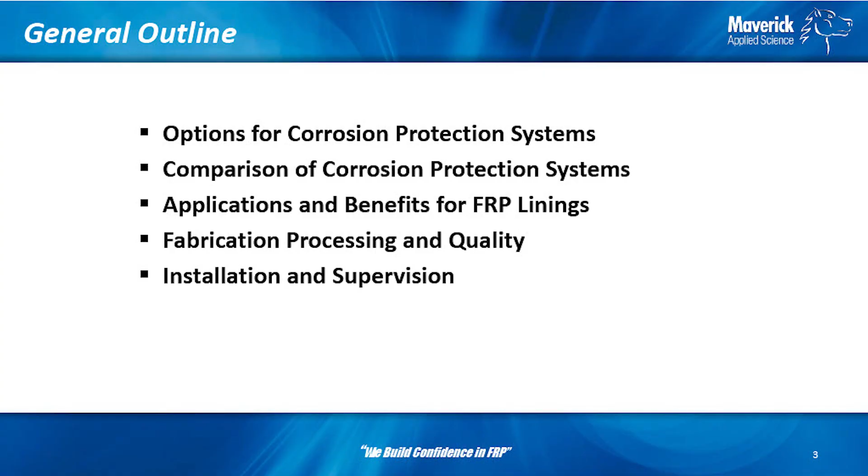As a general outline, we're going to talk about a general view of some of the corrosion protection systems. Then we're going to go in and talk about them and do a comparison, kind of where they fit in the process of selecting corrosion-resistant materials. Then we're going to go into applications for FRP linings, and we'll talk about some of the processing and fabrication as well as installation.

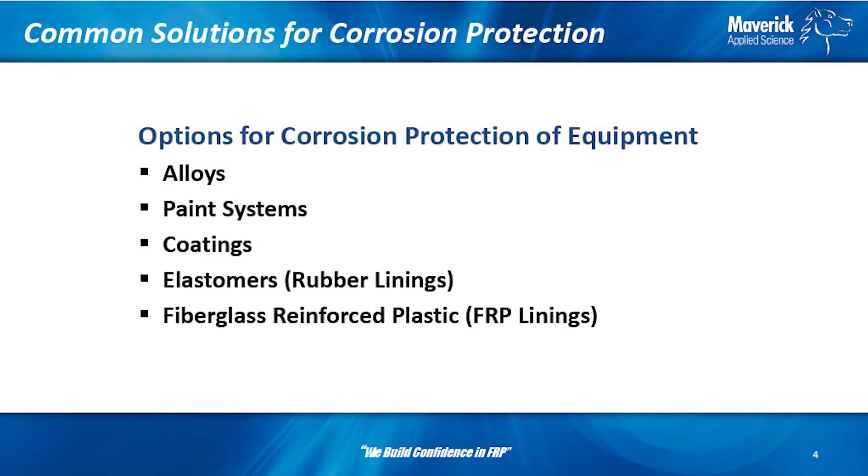When we're talking about corrosion-resistant solutions, this is really your broad group of options. You have alloy materials, you always have paint coatings as an option, and then we get into heavier coatings - more epoxy-based coatings or other trowel-applied coatings. Then elastomers like rubber lining, and also FRP, which can be a lining, or you've seen a lot with FRP complete structures as well. But these are generally your options.

My view of things is that every material has its place and its sweet spot, and there's a range there that they work in. Some of them cross over, but some shouldn't. So what we try to do is find the right material for the right place. And FRP doesn't work for everything, I'll tell you that.

There's some places metals work much better, particularly at higher temperatures. There's times because of concentrations and temperatures, maybe we start to look at dual laminates. Everywhere has an operating range, and what we try to do is find that material that's in the middle of that range, or maybe we want to be at the 75% level of what that material can do.

We don't want to be on the ragged edge of a material selection. If we see a material that's good up to 200 degrees, we don't want to put it in an operation that runs 200 every day and is probably going to fluctuate every now and then and go to 205, 207. We want something that operates at 175 or so - a comfort zone where we know we're going to get good properties and the corrosion resistance is going to be really consistent.

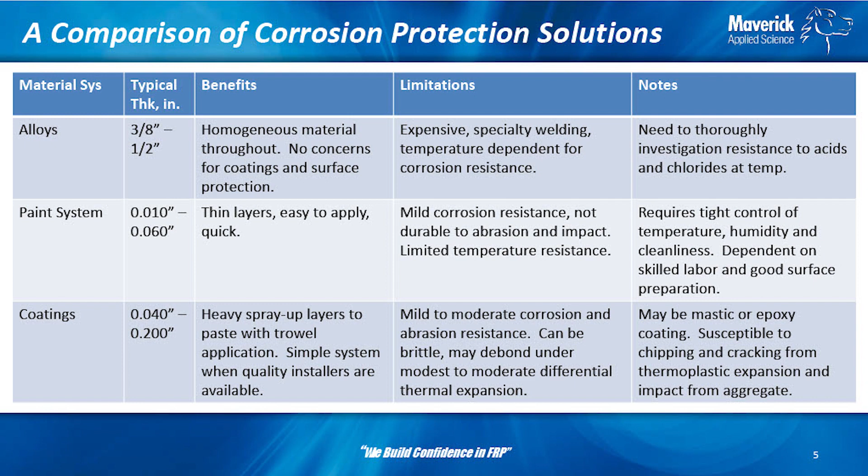So going from there, we're talking about painting. Typically, painting is going to go over carbon steel, which is a fairly inexpensive material, readily available. But painting is not going to work good. We're talking about 2 or 3 coat epoxy systems - those are going to work well when you have modest corrosion-resistant applications, where it's not submerged in a fluid all the time. Maybe it's dealing with leaks, or more outside weathering and that sort of thing. Generally, the thickness is 10 mils to maybe 60 mils thick for a heavy paint coat, so you don't have a lot of material to go through when you're looking at painting.

And then coatings, you're getting into heavier applied epoxies, mastics, things like that. Part of the challenge is that the thicker you get, those materials, because they're basically like a resin material, have no reinforcement to a great extent, or if there is, maybe it's just like pumice or sand. So there's not a lot of durability, they tend to not handle thermal expansion well, and they chip and crack with impacts. So again, they have their place, but you have to weigh these things out on what might work best for you.

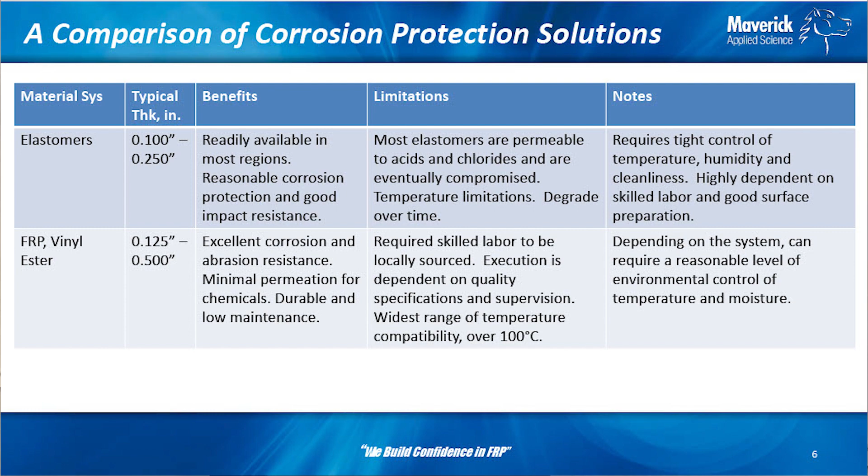So then we get into elastomers - broadly we're talking about rubber linings. Our gasket people probably know the most about those materials. There's multiple rubbers to choose from depending on services and performance requirements. Generally those are 100 mils thick, so 1/8 of an inch to maybe 1/4 inch is pretty common there.

With respect to linings, they are very dependent on surface preparation, and that goes across the board. We talk about white metal finishes, and you have to maintain a quality working environment the whole time. That means it generally needs to be above 50 degrees Fahrenheit and below 100, and it has to stay clean. We want the humidity probably below 75%, between 50 and 75 is really good. If you're in South Louisiana or South Texas in the summertime, that's really hard to do. So if you have those kind of jobs, there needs to be a QC guy in there literally 24/7 measuring humidity and temperature in the work environment.

Because if you come in and, like we've seen places where they just did a 12-hour shift and sent everybody home, you come back the next morning and there's dew collected all over the inside of your tank that was just blasted the day before, and now it has this orange haze everywhere. Well, you can't just go back to work - you need to reblast that thing now because they didn't keep their environmentals up. So for all the coatings, that's always a consideration you need to think about.

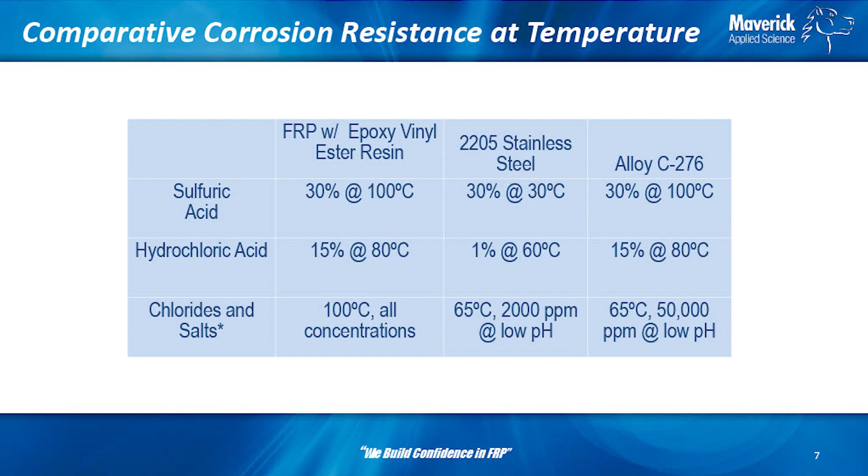Then you go on and look at chlorides and salts - that's a sweet spot for FRP. FRP will handle that almost at every temperature for liquids up to 100 degrees C, we see that. If you look at 2205, it has a sensitivity to chlorides, and it's temperature dependent. So at ambient temperatures, instead of 2,000 ppm, maybe that's 15,000 or something like that. But at process temperatures like what we might see in a chemical plant, a chlor-alkali plant, or an FGD system in a power plant - we've seen where they built and said, well, we want a better material than FRP, so we'll build out 2205. And we've seen through-wall leaks after like 3 years because they weren't aware of the chlorides at the time, because duplex was the big deal. But we've learned a lot since then.

So this is something I put together that's a little different, that I haven't done before. We've talked about these different material systems, and this is based on our experience - what we see based on typical manufacturing practices and typical operation. All those things play a part in service life. Operating conditions here are typically 40 to 80 degrees C, and if temperatures are lower, you extend the life because temperature doesn't play as much a part. Also with abrasion resistance, which I'll touch on from time to time - the type of particle, size of the particle, the shape of the particle, all those things play a part. But just to set some standards, because it is a little subjective.

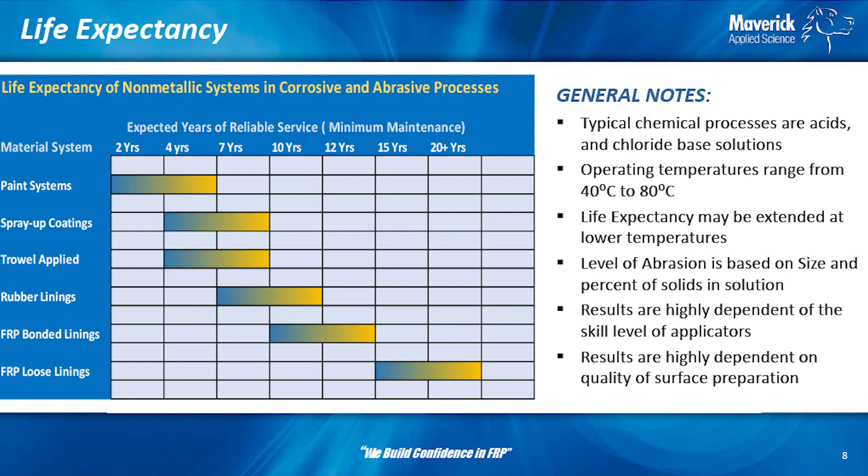And any kind of rework, secondary bonding, that's kind of the issue there. So the rubber lining, 10, 12 years, like I said, we start seeing issues. Something between 5 and 7 is generally where it starts. It's been our experience. I mean, we hear people that say, 'Oh, we've got linings for 20 years or something.' That can happen if it's in a mild service. If you got a great vendor and everything kind of lines up, it can happen.

Dale talked about chlorine headers and 40 years service. We don't see that. So I like to figure out what they're doing, because we would share that. But I mean, it can happen, but there are a lot of factors that have to kind of line up for those things to happen.

So then we go to FRP bonded layers or bonded linings. And so this is basically, like we talked about, we were showing a rubber lining that's peeling off. We've worked with owners where we'll write specs, we'll have a quality guy on site all the time, and they'll blast it out where we're basically doing a test of the surface. So we're actually looking for like a pH value. You want to see that there's no chemistry left in the steel structures. We're checking surface profiles, and then basically we're doing laminate tests to make sure we're doing bond tests and pull tests to make sure we can get a good bond.

And then we're saying, okay, now let's go to work. And they'll do it basically in courses, like from top to bottom or around if it were a really big tank. And it's a lot of monitoring, and generally we can get a pretty good job because there's a lot of attention put to it. And generally that's something 12 to 15 years is what we see on these kind of linings. If it were an FRP tank, we were rebonding it and putting a new lining in an FRP tank, we would see generally the same kind of service life.

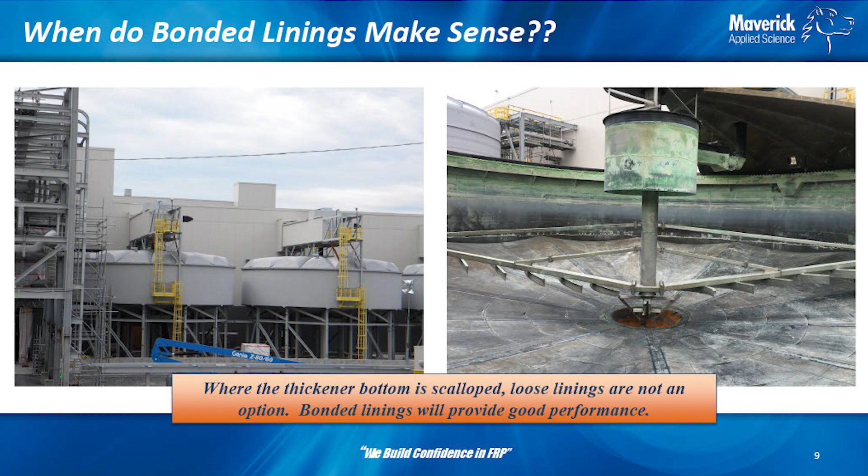So when we talk about bonding, here's a good example. This was rubber lining after around 10 years or so, and they're starting to have some edges peel up. So this is where we would basically blast out the lining, get our surface profile - probably it's going to be covered - and put a primer down so we can get a bond to the surface. We have primers that literally bond to almost anything: concrete, stainless, carbon steel, and they work great as long as we follow the rules.

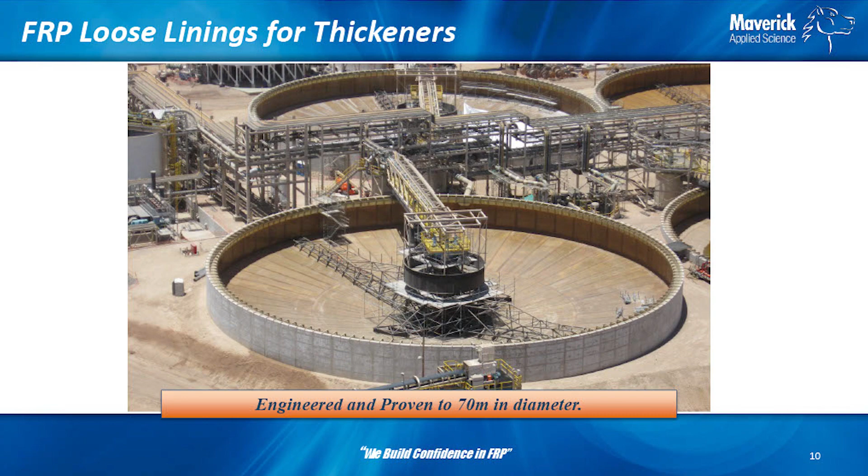And then we're going on with an FRP structural lining after that. So when we talk about loose linings, Kevin showed some photos of this earlier. This is a panel construction, and we've seen these done up to about 70 meters - very large structures, highly engineered. You can see the panels and the amount of weld. If I was doing that all by hand, it would be a patchwork all the way around. We basically eliminated probably 70 to 80% of the handwork that goes into this.

So we're going to drill down on this a little bit more now. As I mentioned, that last one was concrete - I think that was 60 or 68 meters in diameter, so over 200 feet in diameter. We can do it in steel as well; those tend to be more like 30 to 50 meters probably - that tends to be more typical.

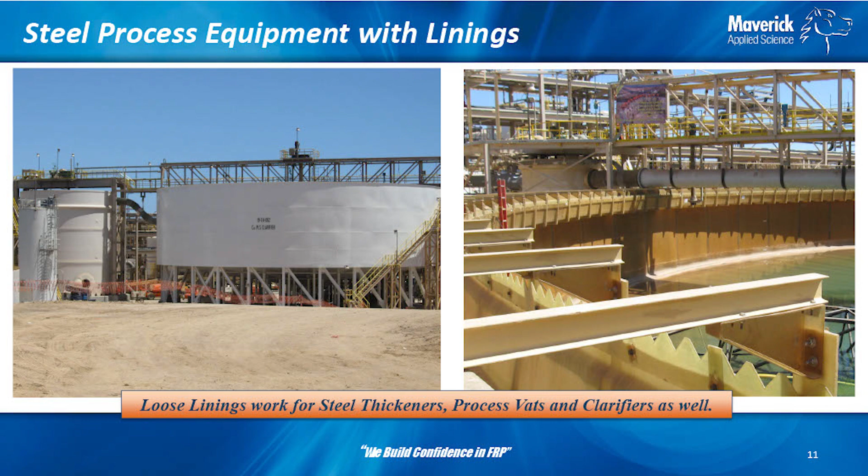With those, basically they're putting some sort of waste material in. It can be something coming to the clarifier from their waste ponds or something like that, where it's got solids in it. In mineral processing, it's going to be a raw, concentrated aggregate with rocks and sand mixed with, say, copper sulfate in a copper process. They're letting the solids settle down to the bottom, and that's what that sweeping rake does. Then the pure clear material comes over the top. We have these weir plates where it trickles into the trough, and they cut off the sweet material - should be cleaner, and then it's further refined after that, just to give you a little insight.

So what makes them work? You've already talked about some aspects of non-metallics - thermoplastic, thermosets like FRP - and thermal expansion always comes up in the discussion pretty quickly. So to give you an idea, we were looking at the coefficient of thermal expansion.

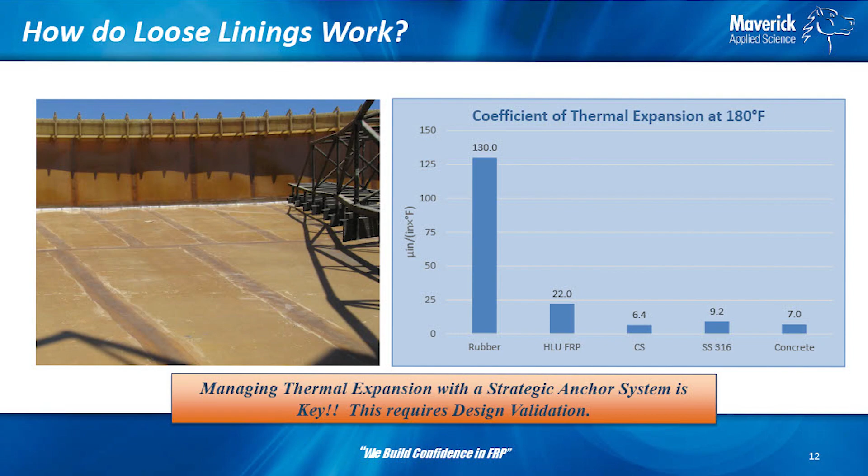So you have rubber here, this is basically micro-inch per inch per degree Fahrenheit. Not surprised that's going to expand and contract quite a bit - you got 130. Here's hand layup FRP, again at process material - this tends to be very resin rich, about 60% resin to 40% glass. That resin is what drives thermal expansion. The more glass we have in it, we start to see that coefficient come back. When we get to filament winding, we're like 60% glass to resin, and that number will go down to 15, 16, something like that.

But when we compare that to carbon steel, FRP is like 3 times as much at that temperature, and you can see where concrete and stainless are as well. So just for that reason, you can see why FRP needs a little bit more attention than what you might expect from a lot of processed materials.

So here's a closer look at this lining. These were the same linings that Kevin showed earlier - this was in Baja, California, very south, very tropic. Our inspector was here for about 3 years looking over these projects, so a really good inspector - he definitely liked this climate. But he would take temperatures at midday, and he would see 140, 150, and all of a sudden, with no pressure, these were expanding such that they were buckling and moving.

So this is part of the design process: you have to look at that full-empty scenario, because others hadn't, and we actually saw panels cracking at the joints. So it's not like you can just buy a bunch of panels, throw them in there, weld them up, and expect everything to work out.

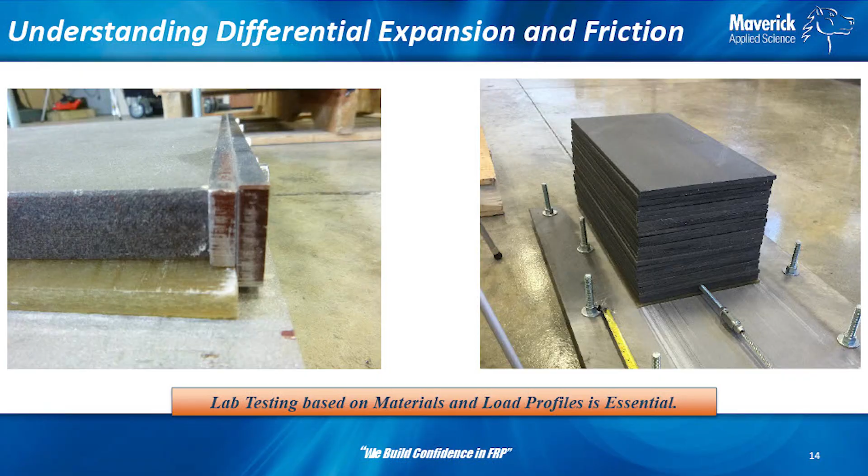So we actually made a sled with an FRP panel on the bottom, made to a certain roughness on one side, and did friction testing. We pulled it across a defined steel plate, basically like what we'd see in the process. We looked at what the friction was, and each of these plates represents about a foot of liquid, so we looked at it at different liquid levels to understand all the aspects of what was going on.

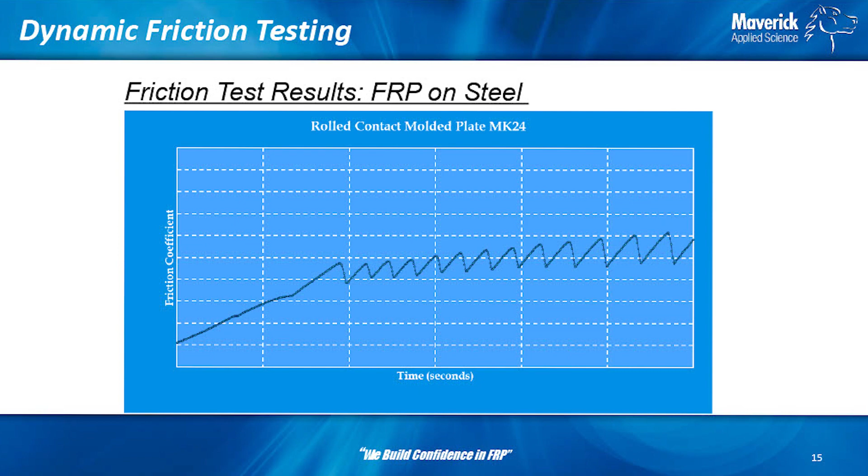This is what a dynamic friction test looks like. You go from static, and you're pulling where it resists, and then you hit a point, and all of a sudden it gives, and you see this kind of effect after that. So this is what a result might look like, to give you an idea.

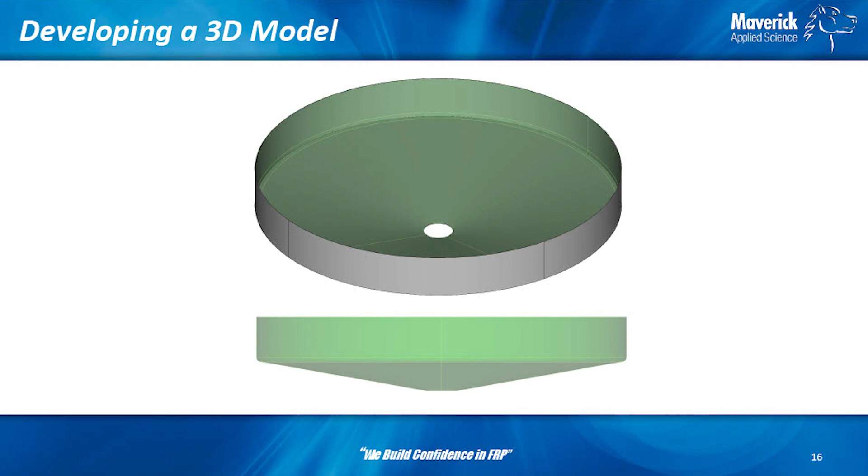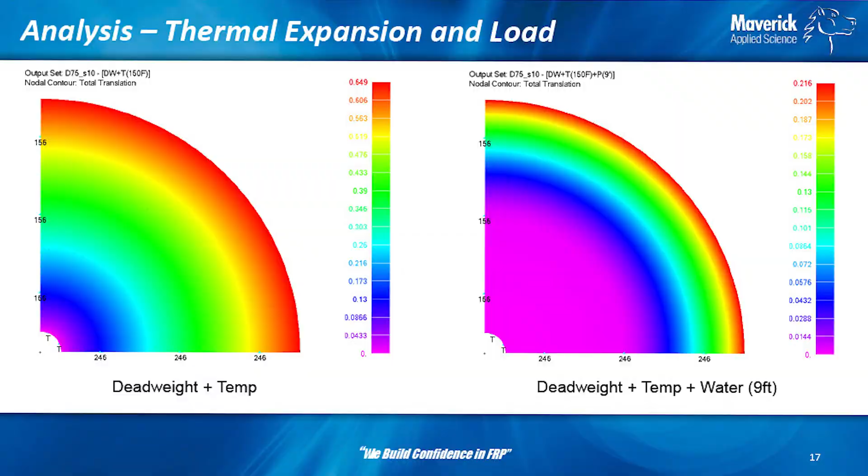We took that, modeled it, and looked at it at different diameters and levels of liquid. So here we have it - this is empty, and this is with 9 foot of liquid. When it's empty, I showed you all that thermal expansion, so by the time it gets to the outside edge and hits that corner, it's expanding, approaching 3/4 of an inch.

When we start to put the liquid loads on it, because we've worked out friction factors, we find that liquid is actually helping us - it's reduced the expansion from almost 3/4 of an inch to less than 1/4 inch. So that's the amount of engineering required for this kind of process.

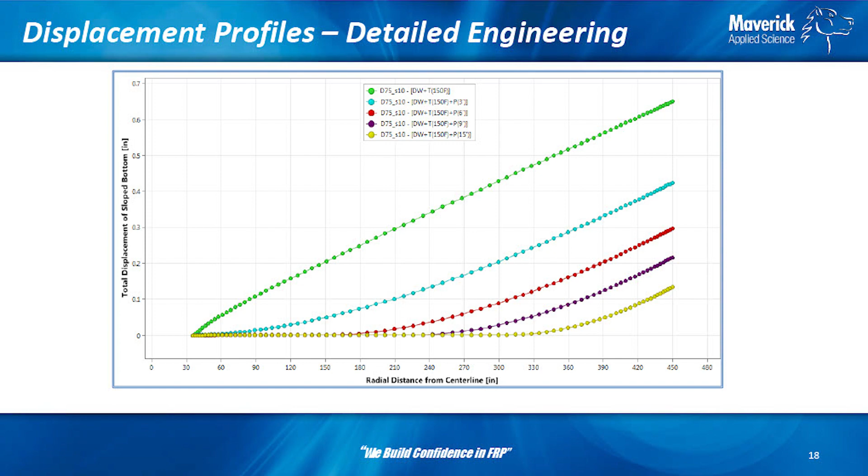This is a further representation - each of these represents going from no liquid to, I think, 3 foot, 6 foot, 9 foot, 15 foot. You can see the greater the liquid load, it's kind of like soil bearing for buried pipe, where the soil pins the pipe down so it doesn't expand and contract underground. It's a similar concept.

So this is what we've done, and we've gotten to a point where we understand it. We know where the limitations need to be, and here you see with that liquid load, the stresses are now under 3,000 psi.

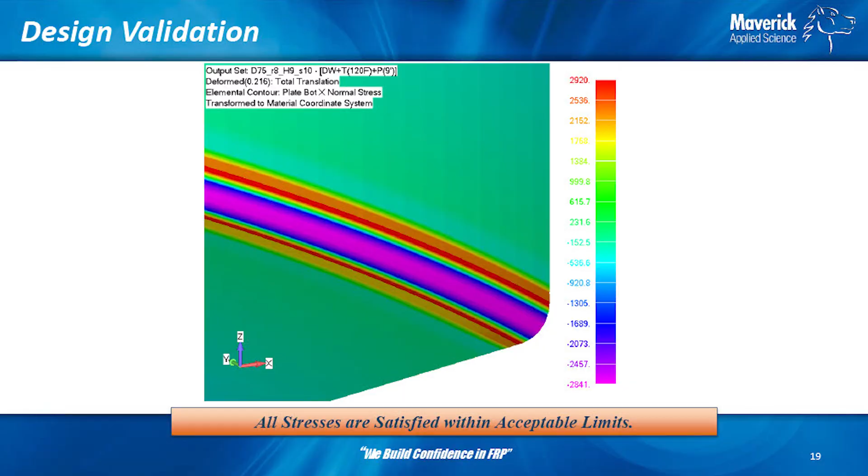Some of the keys are fabrication. Because these are so large, they have to be super flat. We don't want the edges curling up, because then you're basically creating a lot of stress points. We work with a lot of vendors and figured out how they need to be built, what the control points are. You can see we can actually achieve a really nice flat product, which is kind of rare and difficult to get that kind of stability out of FRP.

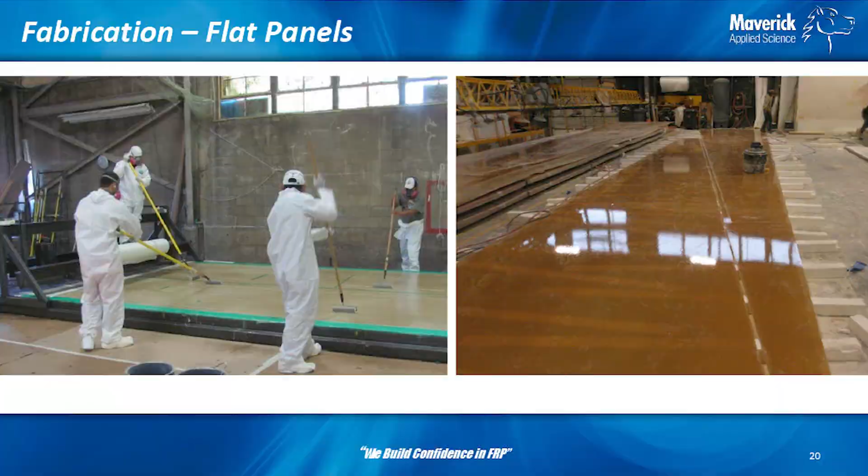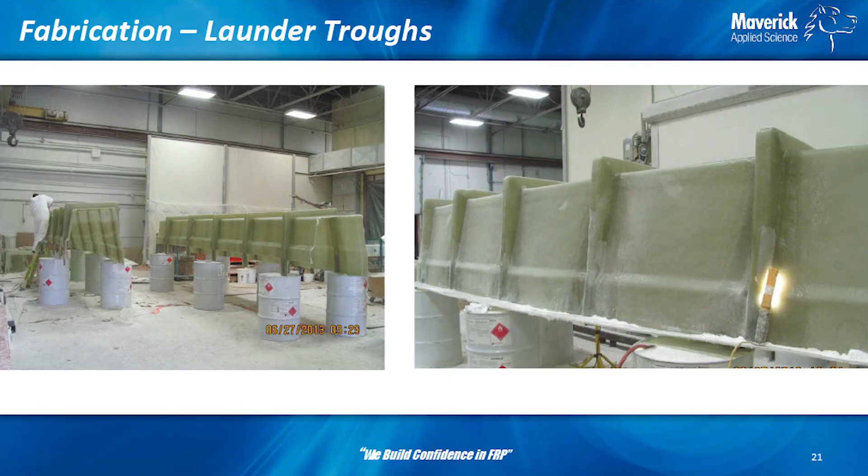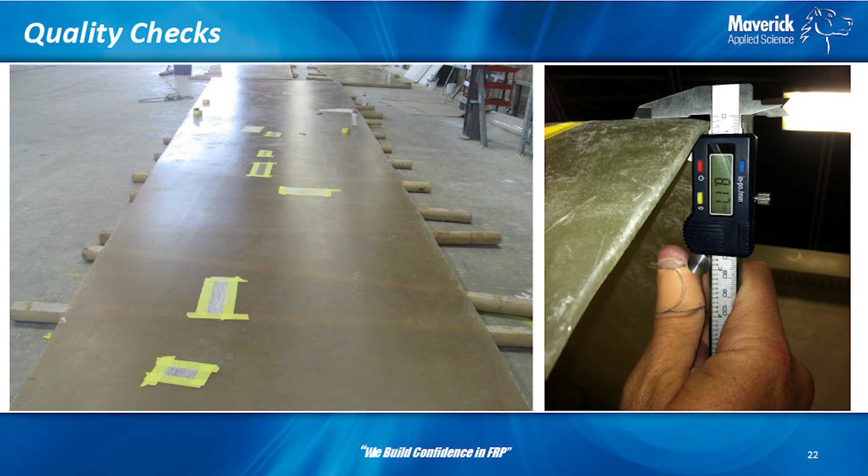So these are some of the launders, those troughs that I showed you around the sides. They're very labor intensive hand layup, a lot more of that classic FRP hand layup material goes into that. All these points are something we're inspecting and making sure we're hitting the quality points, because when it goes together, the seams need to match, everything needs to come together well. We don't want any surprises.

If you have any edge curling up, or we get those waves that I showed you, you need to understand what the impacts of that are. We've framed our spec, so we don't want to go awry from that. So these still require quality.

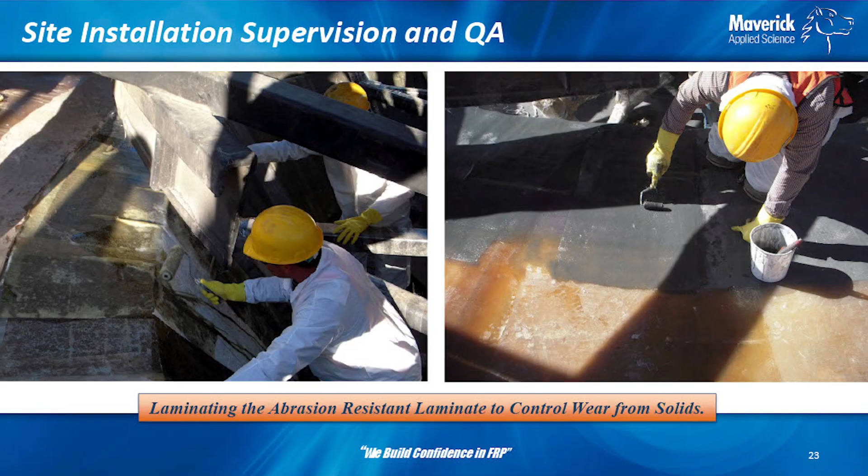Here is an example where we have to have a lot of site QC. So we're bonding here at this center point that I showed you, and you'll see the location of that a little more. Because there are solids in there, we have to use abrasion-resistant materials toward that center point, because as the rocks and heavy solids are coming through, it's kind of a pinch point where you're getting a lot of impact in that area and a lot of wear.

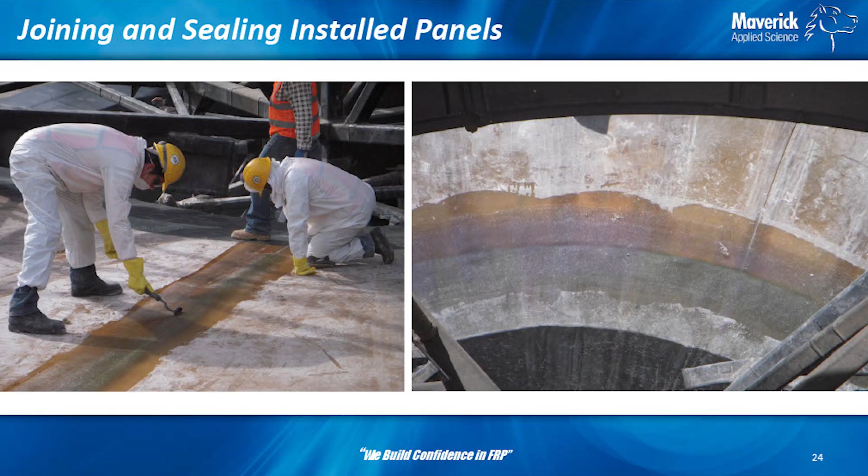So we tend to do silicon carbide layers there so it'll be more resistant to impact, and because some of the rocks can get quite large as well, to help with the wear. This area is actually bonded directly to the steel, to the concrete, whatever it might be, so that when I talked about that anchor point in the middle, this is kind of where it sets.

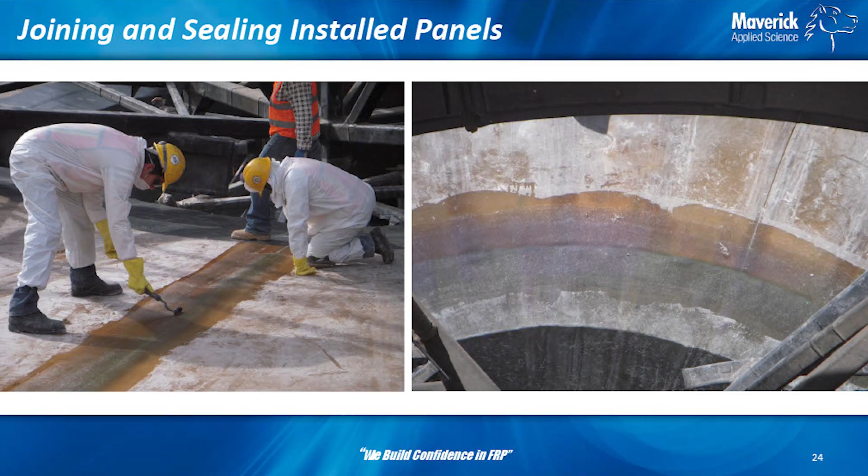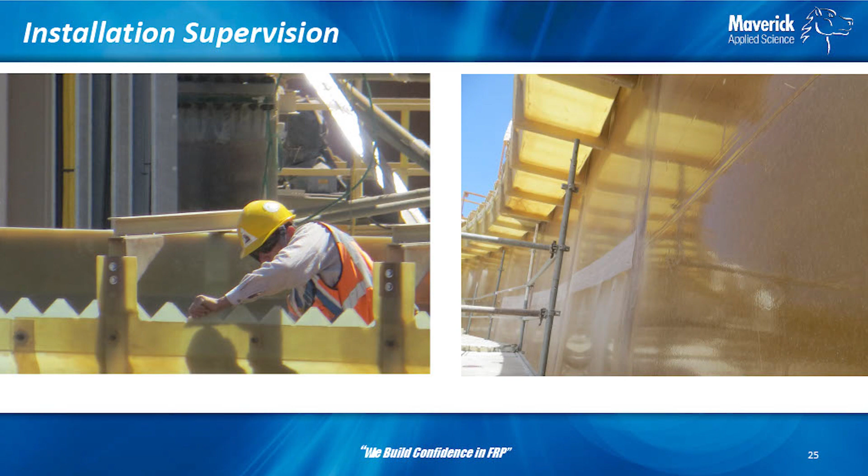And then from here, this is the start of the panels that you see here. So this is all bonded to the steel or concrete, and then our free floating panels go up from there. You can see them doing the joints there. Obviously these are big processes, big equipment, needs quality supervision, needs understanding of the materials and the details. QC is a big part of that.

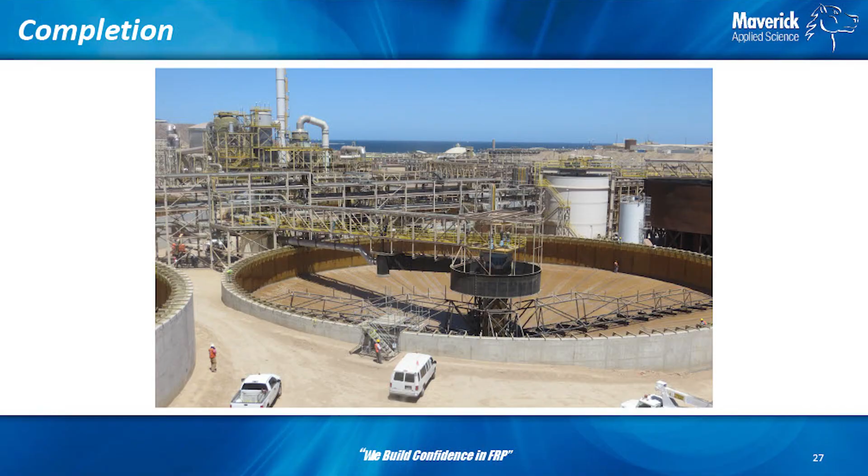This is kind of what the panel construction looks like. Here's a better look at that center point I was talking about, to give you an idea of what it looks like when it's completed. This rake here is pushing the rocks around and bringing them down. This can be FRP lined, rubber lined, or alloy. Lots of choices with that as well.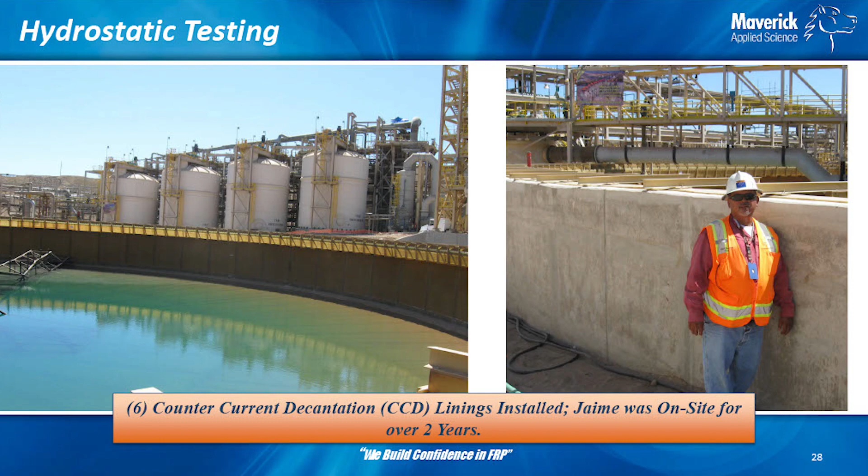This is Jaime. Jaime was the guy out here on the site for like 3 years. He's a good man. What I wanted to present, we've talked a lot about bonded linings, and this is something we have seen done.

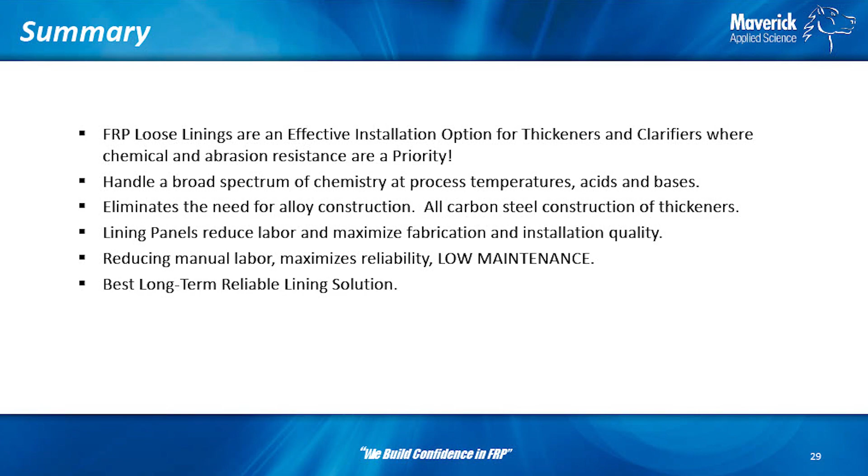We've seen it done well, we've seen it done not so well, and basically we've dug into this over about 10 years and got to a point where we understand it. We're actually working with engineering companies now to specify these because they are a very good option.

Because of the panel construction, it minimizes the hand layup time. The hand labor is kind of an issue that challenges the quality, I'll say. Also, the efficiency and time of installation - it's speeding up the time of installation as well. So it can be a very good option there.

I know everybody doesn't have processes this big, but things are changing. We're getting into some of these lithium processes, and like I said, we're doing clarifiers in other places where we're seeing everybody wants more and faster, and so this is starting to come into play. So I wanted to present that here.